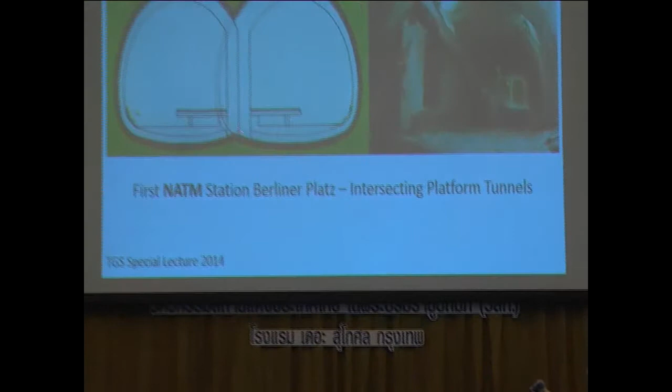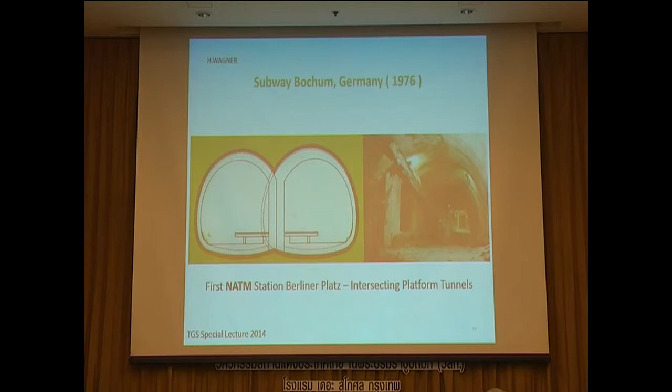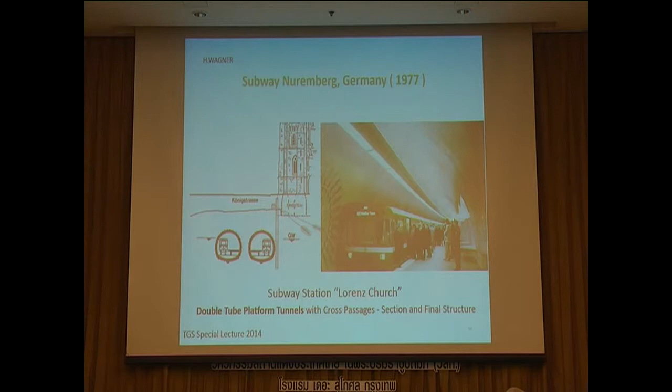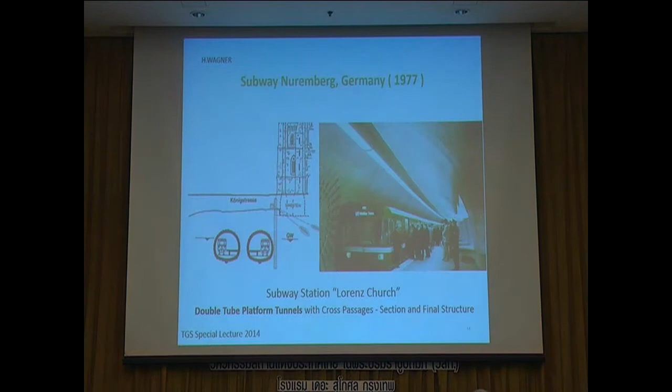The next one was another metro station for the subway of Nuremberg with separated platform tunnels, but the separated platform tunnels have been connected with access tunnels from one platform to the other. It was about the same size, 120 square meters for both platform tunnels together, but instead of the structural concrete pillar in between, there was an earth pillar.

You can see here the earth pillar, which of course needs some geotechnical consideration because of the forces coming down and having to be guided around. So this earth pillar in between is getting higher stress and has more stress accumulated than before.

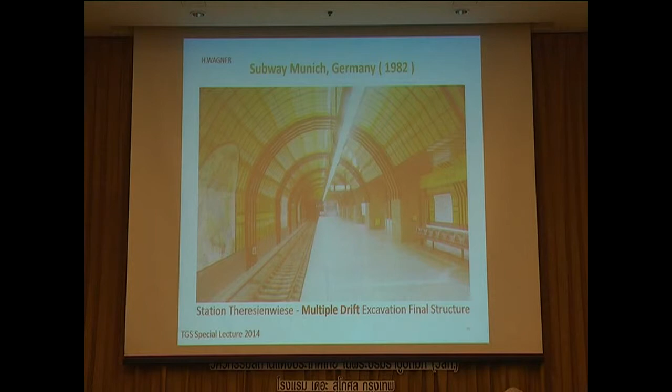Those of you who like to drink beer know that in October, under this surface, there is a station, but on top there is a lot of beer drinking. It's the famous Oktoberfest in Munich.

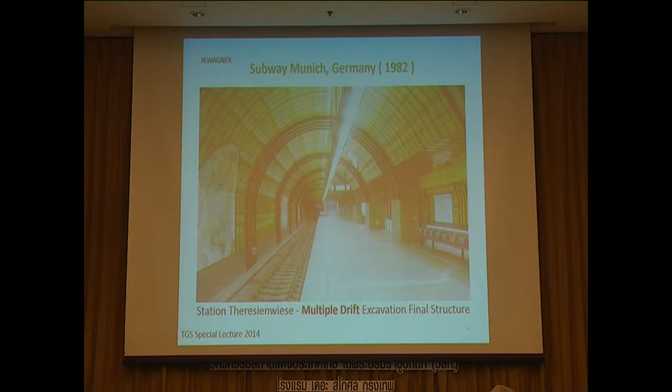So in North America, the Fort Totten metro station for the Washington metro followed almost exactly the same structural principles as experienced for the Munich metro, with one additional aspect: the environmental aspect, because this Fort Totten station has been constructed underneath a park.

There was a competition between doing the station in cut and cover and in a conventional mining method. The conventional mining method was cheaper, just comparing construction cost for the civil works, but it saved 10,000 trees on top of that station.

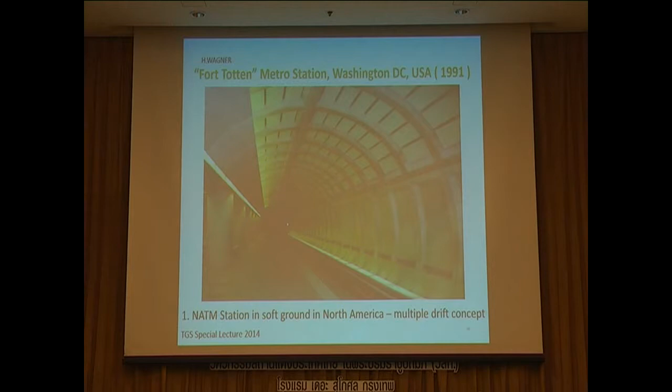So for the people from Washington, capital of the United States, it was very important to save the park and the trees where they do their jogging and so on. So it has an environmental aspect which has not been reflected in the cost, though the mining method was cheaper than cut and cover. It was a big success.

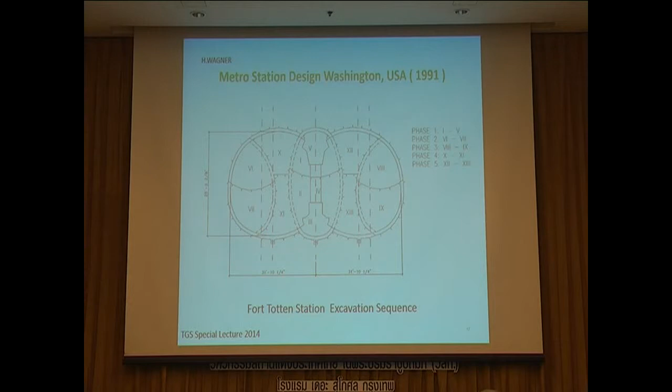Now this slide shows you the excavation steps. There's a central gallery here, excavated in steps 1, 2, 3, then the bottom beam is installed, then the pillar, then the roof beam, then the sidewall galleries here and here are excavated, and finally these shotcrete shells in the profile are demolished to get the full station size.

Washington Metro, of course, all of this needs state-of-the-art numerical modeling. Today we use finite elements.

This shows you in more detail the start of the central gallery with a top drift, then the central gallery full excavation, installation of bottom beam, pillars, and roof beam. Finally the sidewall galleries, then demolishing the sidewall galleries to get the full cross-section, plus installation of the platform.

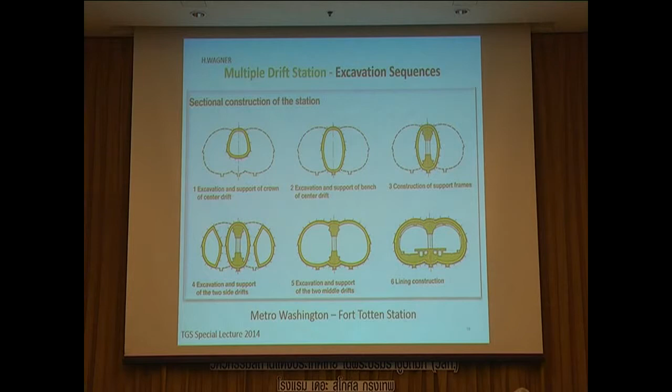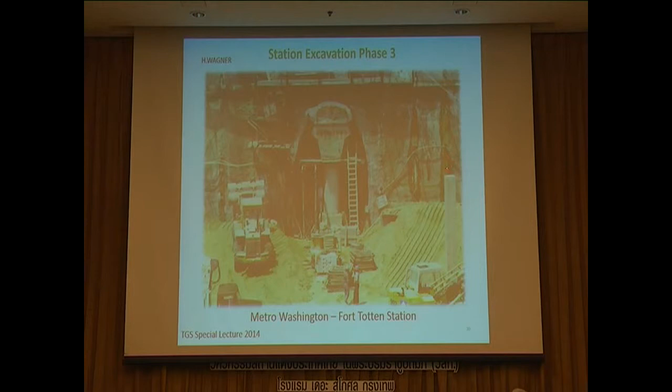Some slides from the construction. This is the portal wall, and you can see the central gallery. You can see the sidewall gallery here, and the sidewall gallery on this side. The central gallery already started to have the beams.

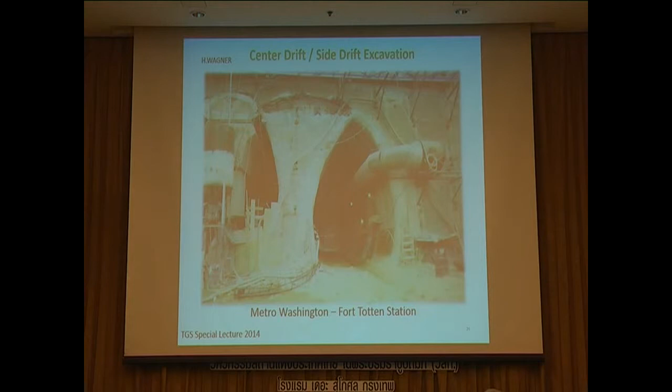Another side drift excavation, a more detailed picture from the side drift excavation. And the next shows you that this all has been in real soft ground, so some pre-running support, umbrella-like support, had to be installed.

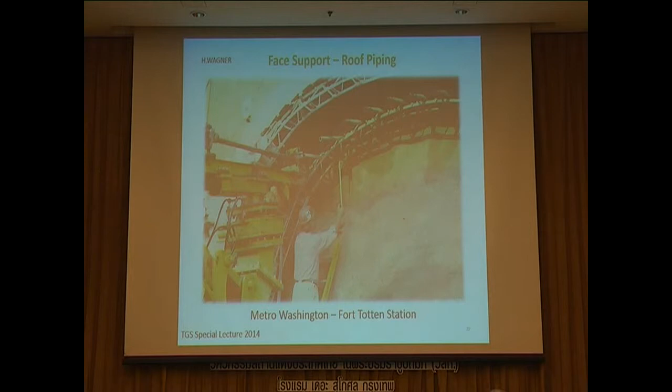Also, you can see conventional tunneling using, mostly in Europe nowadays, lattice girders, so they are not full profile steel arches. Lattice girders give a better compound for the shotcrete.

For the Los Angeles Metro Red Line, we designed for the first time a hybrid solution, which is a TBM tunnel here in this cross section and a TBM tunnel here, with a mined central gallery following the same principle as for Washington and Munich Metro, with the bottom beam, the pillar, and the roof beam. Particular emphasis has to be given to the connection, which in every multiple drift structure using conventional tunneling or shotcrete method requires specific attention in your design and construction for the connections.

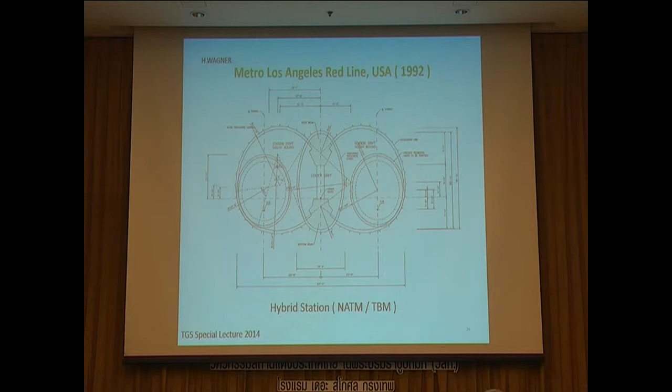For the Chawri Bazar station for the metro in New Delhi, India, a special design was developed with access to the station from cut and cover shaft areas, and then the platform tunnels, mined sections for the platform tunnel, with connection galleries in between the platform tunnels.

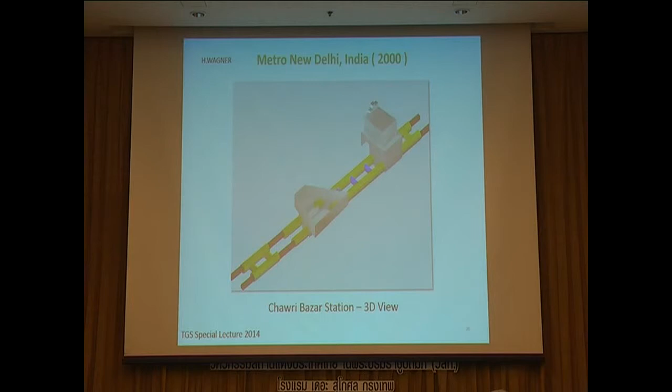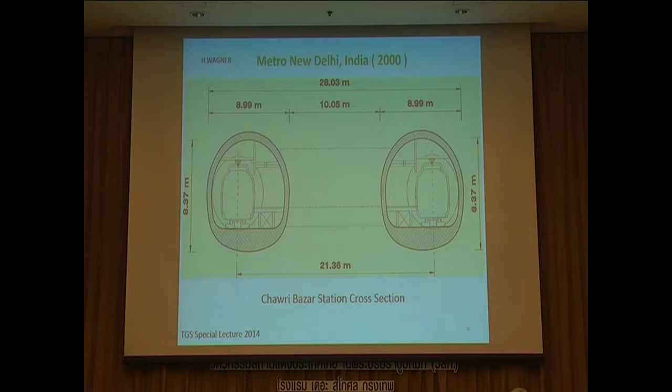New Delhi has successfully completed this. This is a cross section. You can see that there is, from center to center, 21 meters between the two platform tunnels, with a connection tunnel in between.

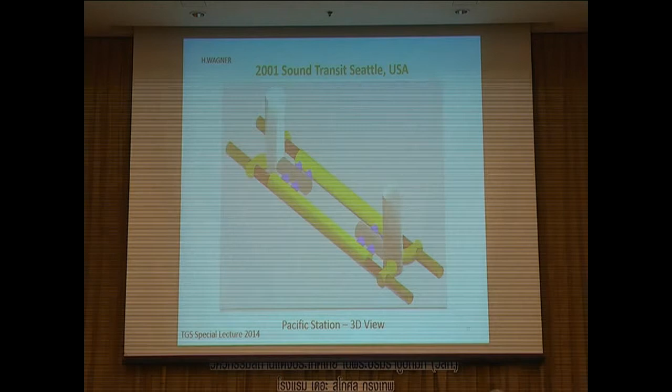Pacific Station for the Seattle Metro. The very special aspect of the Seattle Metro is that it is very deep because the tunnel has to go under the fjord. Seattle is on the Pacific coast, and there are fjords similar to Norway. To connect this line from the center of town with the university, it was necessary to go very deep under the fjord, so the station is more than 300 feet, more than 100 meters deep. Access to such a deep station can only go through shafts. You could not have access through inclined shafts; it has been necessary to do it with vertical shafts.

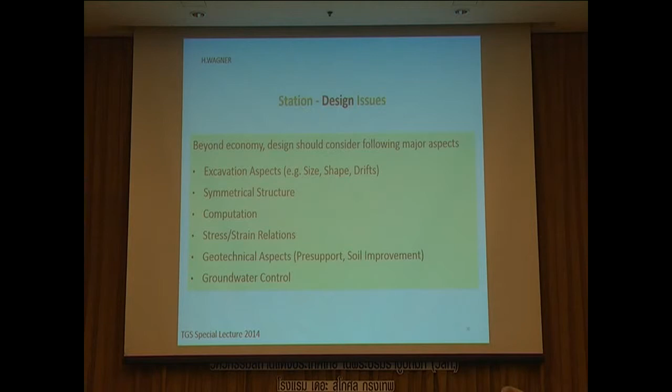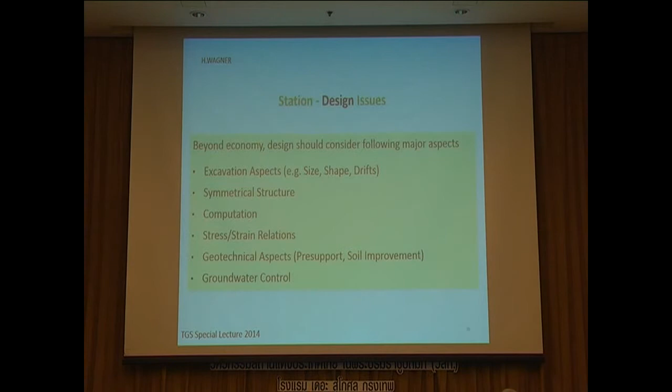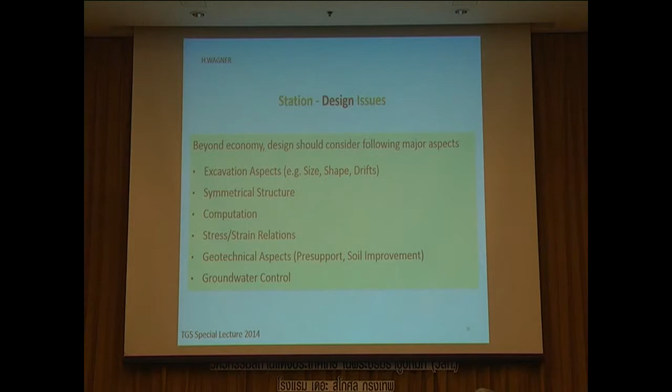So what are the station design issues? Beyond economy, the designer should consider the following major aspects: first of all, the size and shape, and the number of drifts, and the shifting of stresses in the underground. It is always an advantage if it is a symmetrical structure.

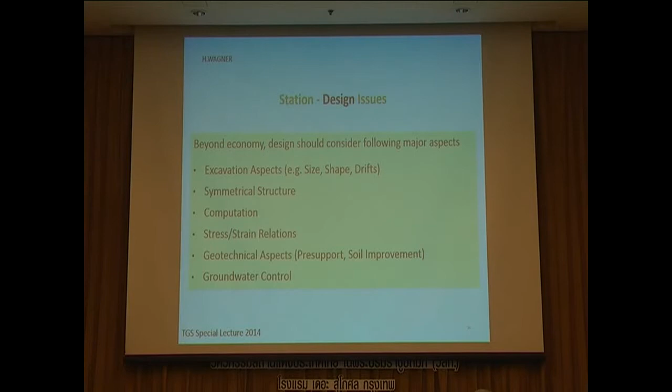Computation—everything has to be computed before we go into construction, in particular where we have to look into stress-strain relations. Then we have to look into the necessities of the geotechnical aspects, in regard to pre-support, mechanical pre-support. We have a number of tools for this pre-support nowadays, in particular also for soil improvement, which for Bangkok certainly is a very important issue.

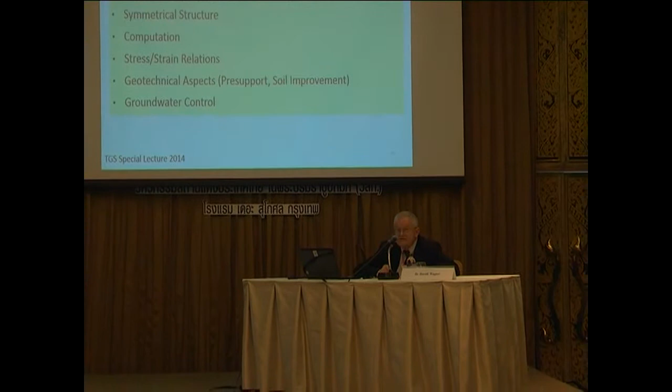There are construction issues for multiple drift stations. Design and construction methods shall satisfy all project conditions defined by the geology, geometry, and the environment—these are given conditions. Construction activity on the surface will be limited to a minimum, and a multiple drift station is limited to construction access shafts that need to be covered. So we cannot have a multiple drift station without access, and the access has to be a cut and cover structure part.

So there are structural issues like shotcrete lining. It has to take full loading in construction—this is a conservative assumption nowadays. Shotcrete quality has been significantly improved, and more projects are using shotcrete as a final structure lining. The final lining is then designed to take full loading, where shotcrete properties are converted into soil properties—again, a conservative approach. It has to be based on the superposition of load cases. We have to make the individual load case investigation, but then finally we have to make the superposition.

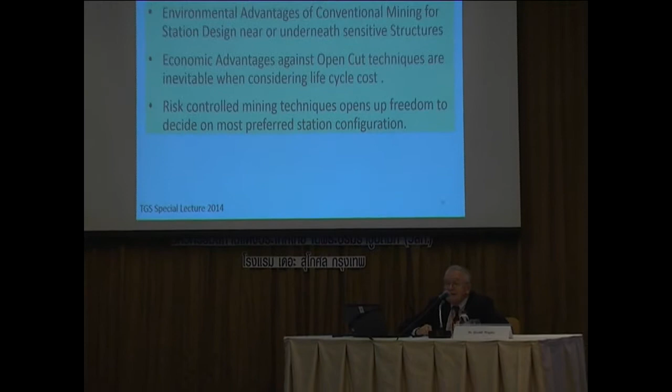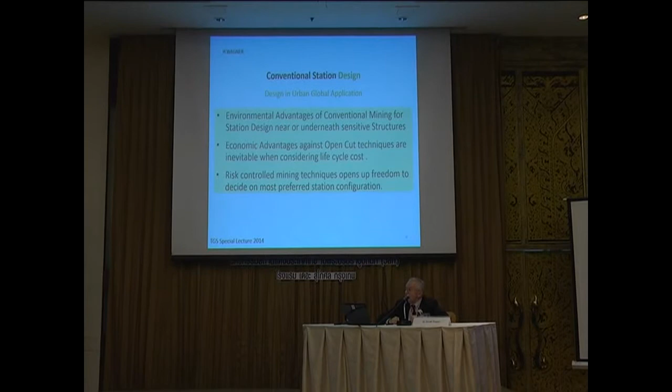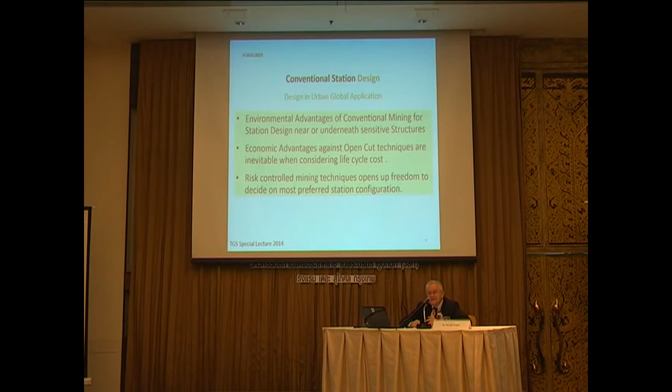In conventional station design, environmental advantages are evident, in particular near or underneath sensitive structures. Economic advantages against open cut techniques are inevitable when considering life cycle cost. We have another couple of cities right now which start to implement metros in different parts of the world, for instance in Chile, in Santiago, and in Lima, Peru. So these life cycle costs nowadays are a standard criterion for deciding what construction should be done.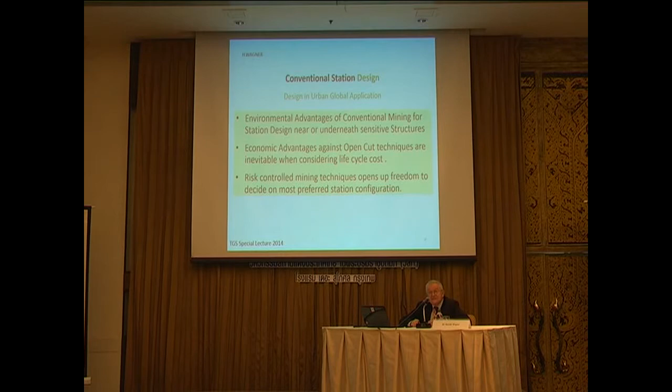And risk has to be controlled. There is always a risk in underground structures. However, there are no new risks—these risks, which are all known, can be mitigated, assessed, and controlled through risk mitigation.

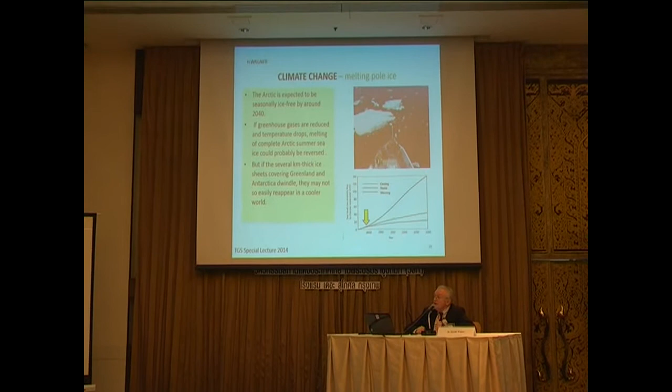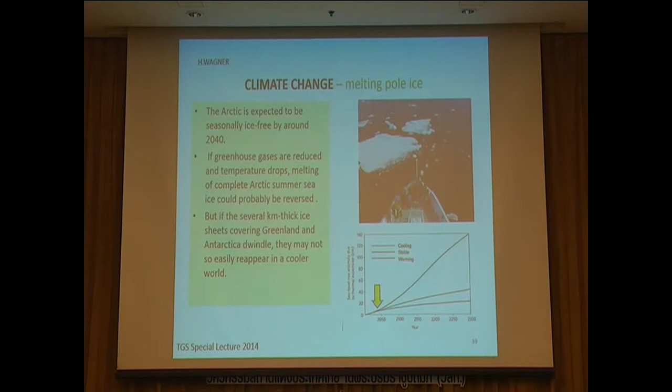Climate change, if we look to the melting ice on the poles, we know that we are 5 minutes before midnight with our measures. We have to take measures in order to mitigate the risk which comes from climate change, melting ice, increase of the seawater level.

So here you can see different forecasts: here we have 2000, here we have 2050, here we have 2100, 2300. In any case, whether we look into cooling, stable, or warming conditions, we can see that the temperature curve increases.

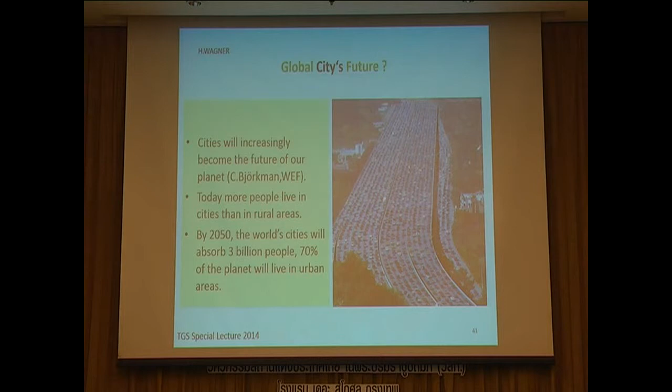So climate change is for sure out of question, it's going to happen. The future of our cities, they will increasingly become dominating our planet. Today already more people live in cities than in rural areas, and by 2050 the world cities will absorb an additional 3 billion people. So two-thirds, up to 70%, of the population on our planet will live in urban areas. Global population nowadays is 7.3 billion, not 7.1.

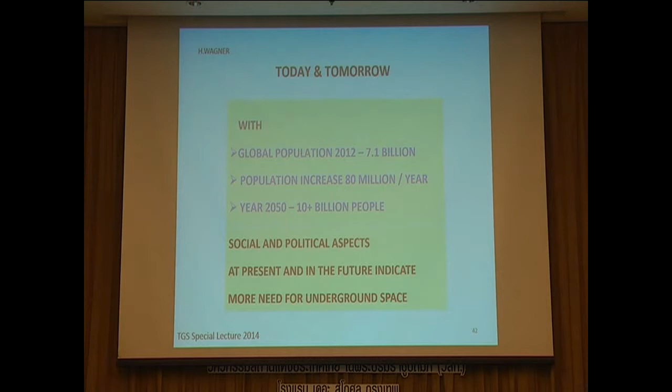The population increase per year is 80 million. We will have 10 plus billion people in 2050, so we have to look into social and political aspects at present and in the future, which all indicate there is more need for underground space.

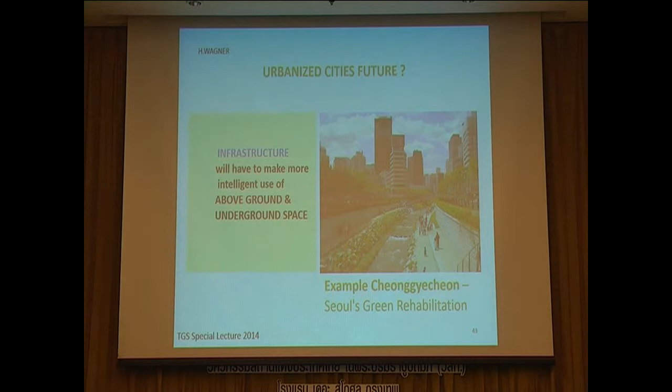An example from Korea, where originally the city and the river Cheonggyecheon has been covered with concrete bridges. Now this river is again given back to the people in Seoul, as an example.

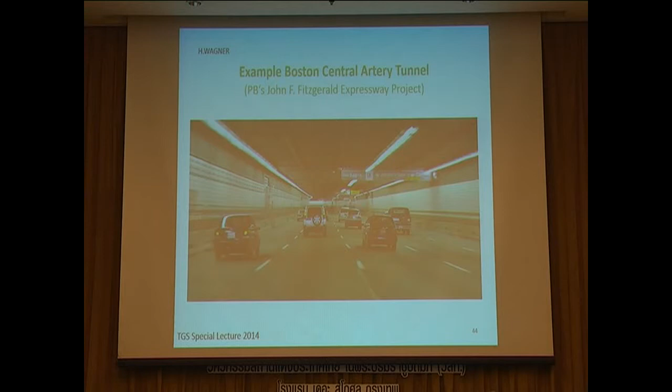Another example is the so-called Boston Central Artery. Here you can see the tunnel. Before, all of this traffic of I-93, Interstate 93 in Boston, was running through the center of the city. Now it's underground and the center of the city is very green and livable.

Urban infrastructures are for different purposes: water supply disposal, transportation, parking, shopping malls, storage, and water lines.

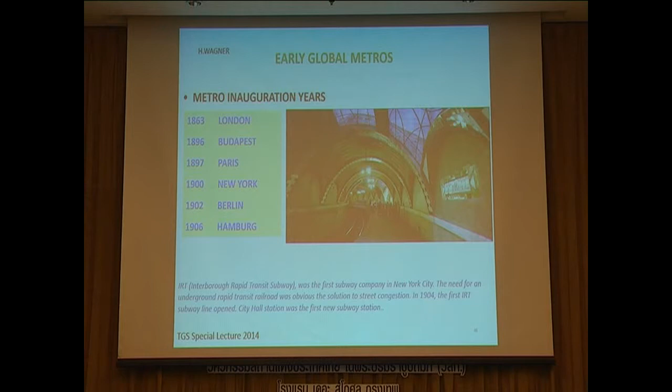We have early global metros since 1863. London claims to be the first. Istanbul at the same time says no, not London, it has been Istanbul in Turkey. Then followed by Budapest, Paris, New York, Berlin, Hamburg. Nowadays we have more than 100 cities.

Europe transportation tunnels: in Austria, where I'm coming from, close to 600 kilometers, Germany 1,400, and in all of Europe we have 16,000 kilometers of transportation tunnels only.

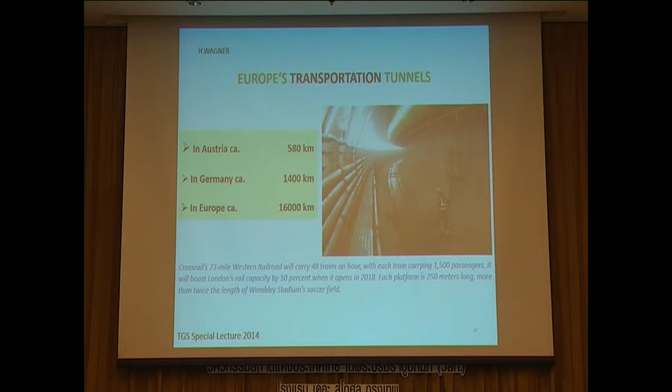The largest TBM right now is on the so-called Alaska Highway in Seattle. It's a 17.5 meter diameter tunnel boring machine, at this moment not working. People are facing geotechnical problems.

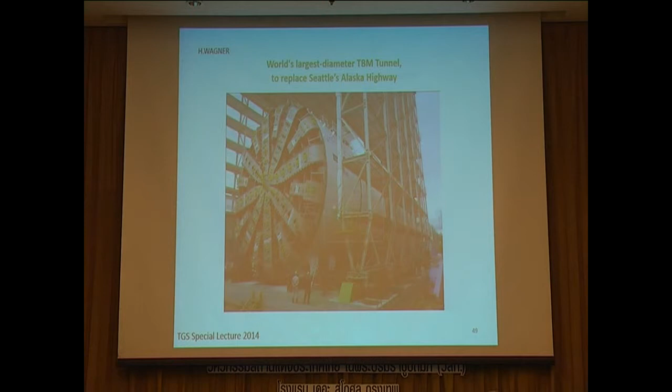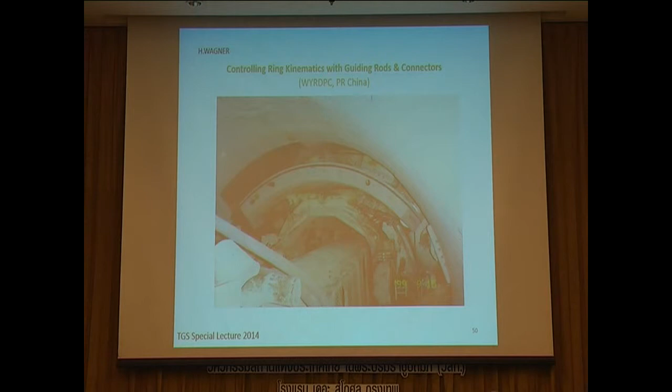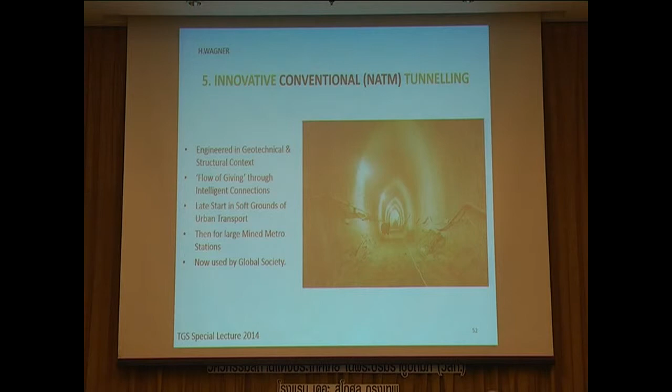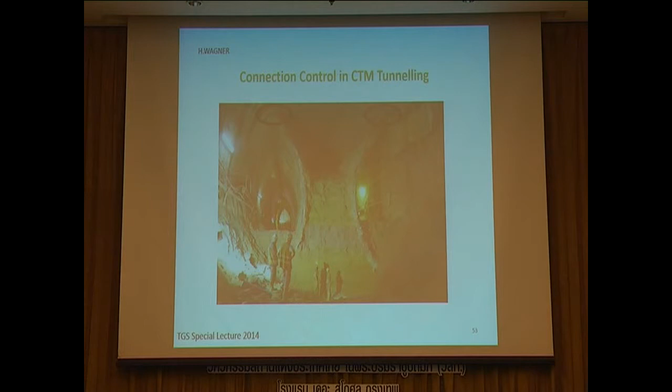Now we have innovations in conventional tunneling, you may look into your slides - I'm running out of time. There are the connection controls: if we have multiple drifts, we have to particularly look into the connection of the multiple drift areas with the final structure. We have conventional tunneling phase and in situ lining, of course, shotcrete lattice girders.

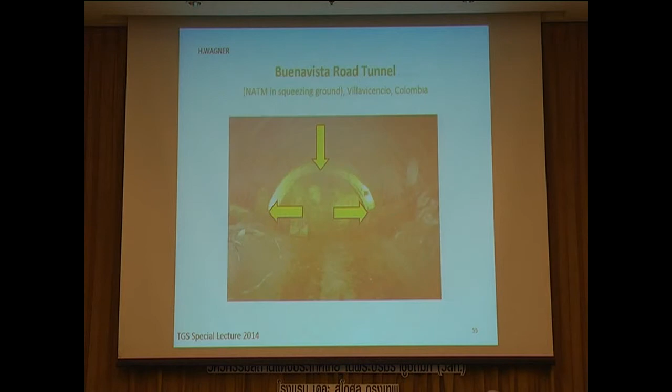We have sometimes very squeezing ground conditions. This comes because we have forces, the geostatic loads, which are deforming, settling the roof here and moving the sidewalls outside.

Flood can be controlled with flood tunnels. Just to let you know, the real cost of the damage in November 2011 here in Thailand - one third has been paid by the insurance companies, and it's the amazing amount of $30 billion US. This is only one third, so the real damage has been $100 billion US from one flood event in 2011.

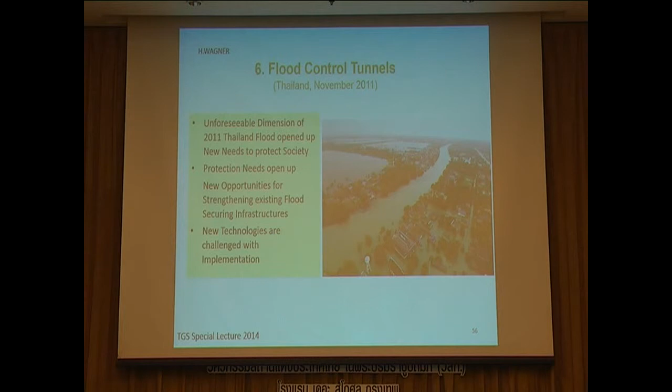And we can control flood with tunnels. This is the flood caused by the Sandy storm, very well known, and it was predicted to be over after 6 or 7 days by the mayor, but actually it has been more than 3 weeks that the New York subway has been under the influence of floods.

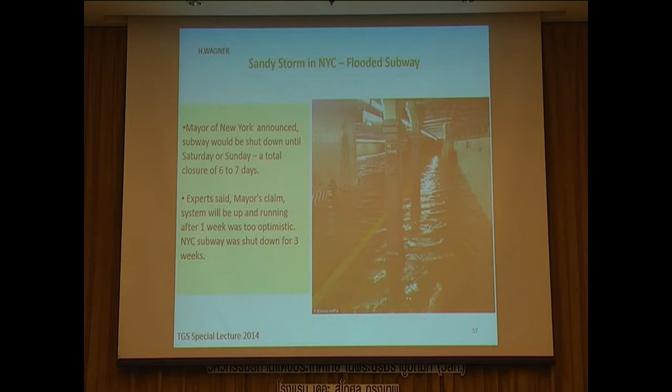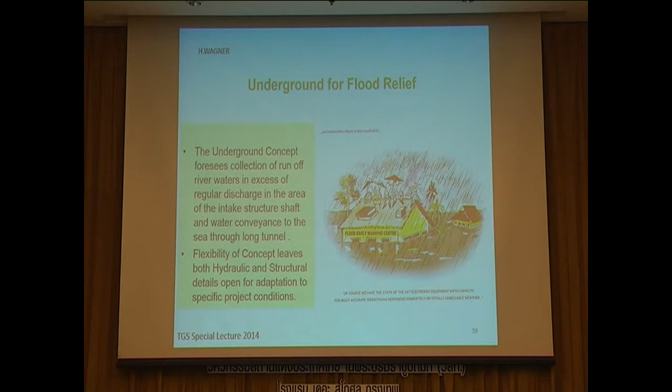All of the coastal areas are at risk, in particular with climate change and melting ice balls. This is a funny picture you can see here - this is the flood warning center, the early warning center. Of course, we have the state-of-the-art electronic equipment with capacity for most accurate predictions, dependent completely on the totally unreliable weather. So this is the fact that we have to use more tunnels in order to mitigate this problem.

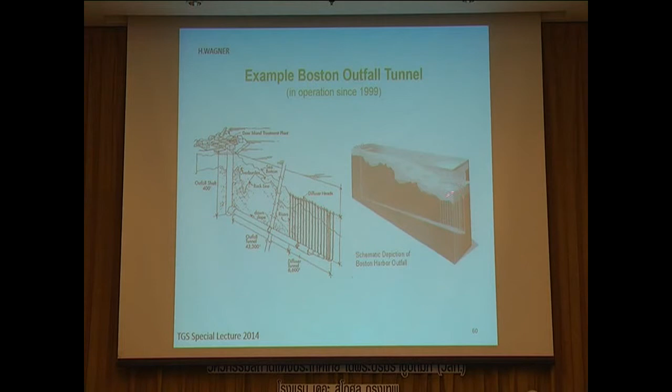This is the example which works in Boston, because I have been working on that project in order to control a flood which comes for a 15 million population of the greater Boston area. This Boston outfall tunnel uses a 400 foot shaft and then drains out the water into the diffuser heads in the harbor of the tunnel. Here you can see a block picture, and it perfectly works.

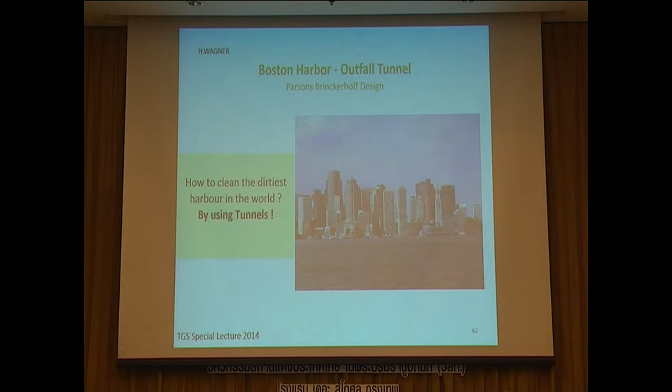So the question was - this is the idea which I developed for Thailand here, for the greater Bangkok area flood relief tunnel. The motto has been: how can we clean the dirtiest harbor in the world, which Boston has been actually. I have seen both before this tunnel has been implemented and after, and now it's a very, very clean project.

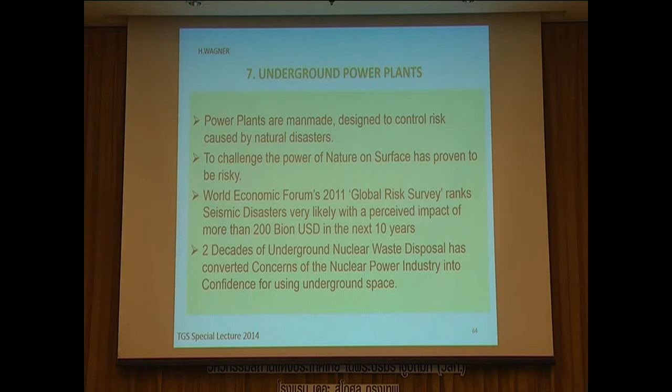That's another idea of the same model. We can go underground for power plants. I have no more time to explain further, but particularly for nuclear power plants, there is currently a preoccupation among planners following the principle highlighted by Fukushima, a terrible accident caused by the tsunami and high waves, which we all know about from weeks and months of daily media coverage. We should put our power plants underground, because the underground will protect them.

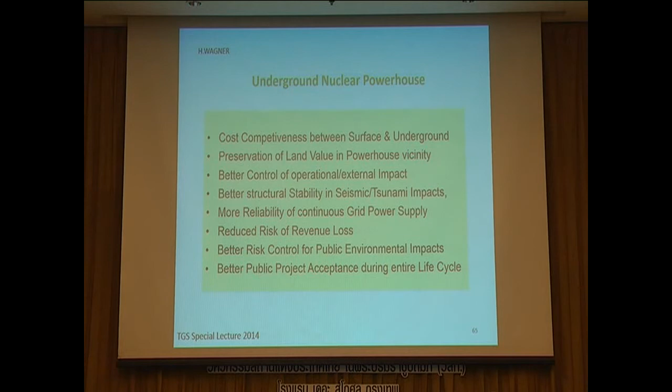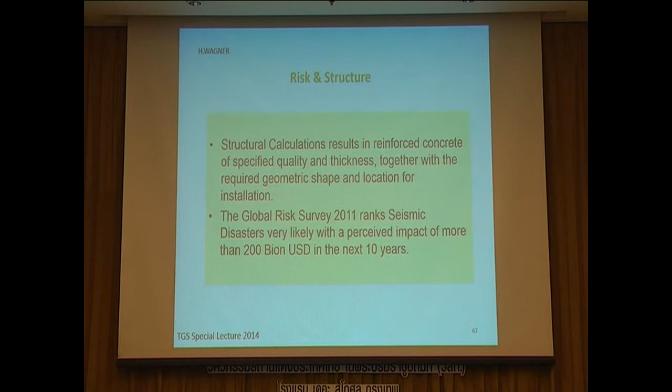So there is Fukushima, there is risk, and there is structure comparison. Of course, the risk is much better controlled underground than above ground, because rock overburden gives better protection than concrete, even very heavy concrete.

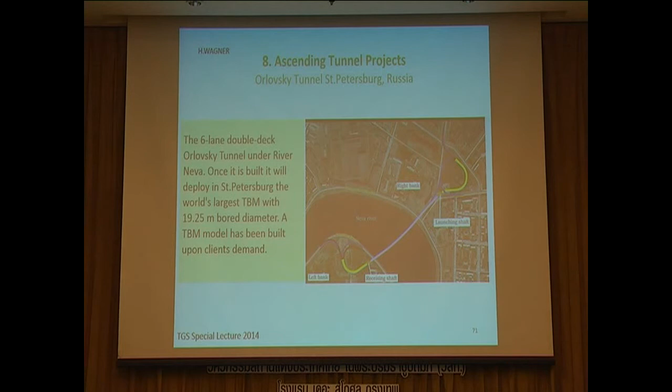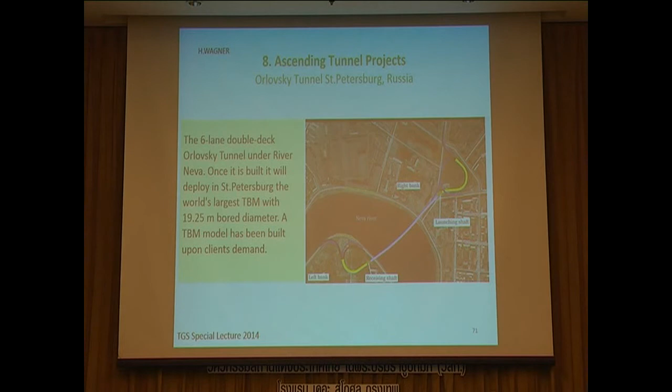There are ascending tunnel projects using tunnel technology of up to almost 20 meters in diameter in St. Petersburg, Russia. The project has not yet started, but the machine has been designed and completely prepared. This is a double-deck tunnel, almost 20 meters in diameter.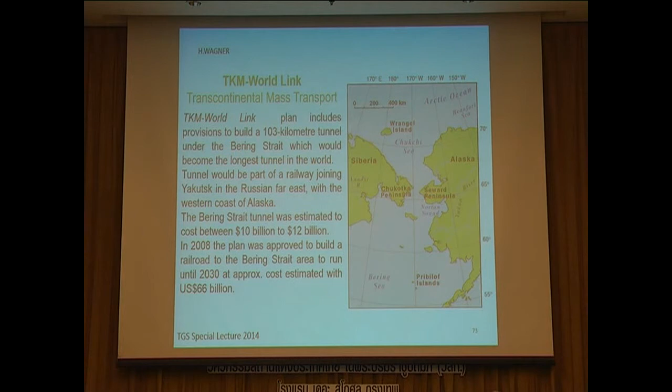Transcontinental mass transport between Siberia and Alaska is a project. It's an engineering dream, but I think it's getting very close to becoming reality, maybe in 10, maybe in 20 years. Another idea is the tunnel between Java and Sumatra in Indonesia.

It's a 35 or 33 kilometer long tunnel. It's also in the study phase, like the Gibraltar tunnel.

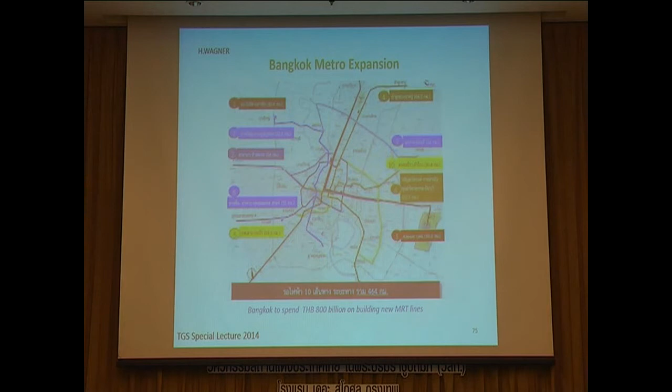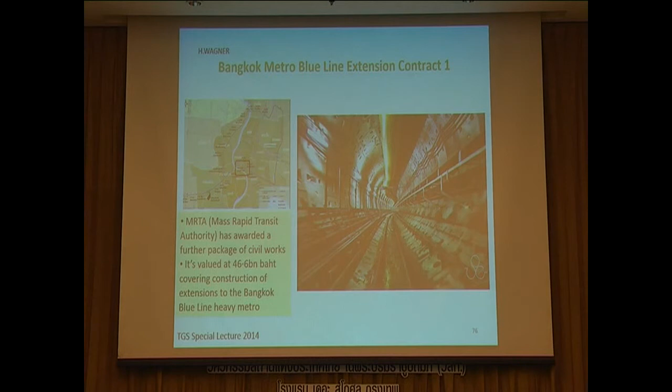Bangkok is going to extend its metro system, spending approximately 800 billion Thai baht over the next 10 years. One example is the Blue Line extension and the Sanam Chai station, which we heard about in the morning lectures.

Singapore is also going to spend 20 billion Singapore dollars in the next couple of years. So Singapore will also have a mass transport system in the range of 450 kilometers.

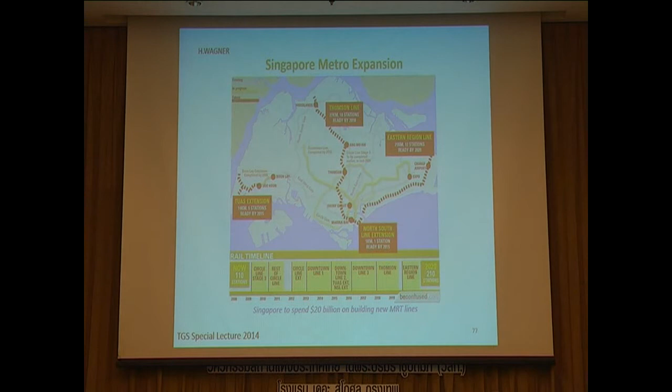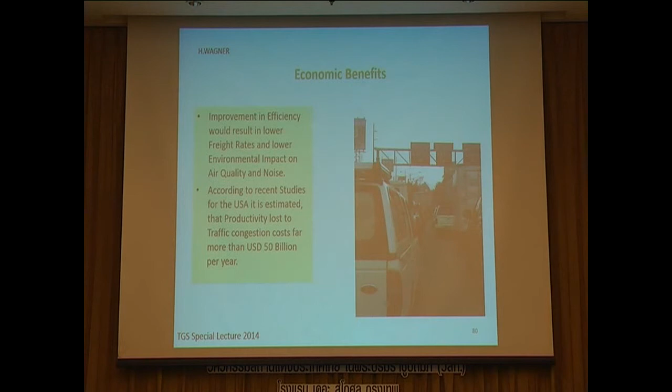Freight could also be transported underground. There is a logistic benefit to it, there is an economic benefit to it, and there's an environmental benefit to that. And finally, the cost benefit of urban tunneling.

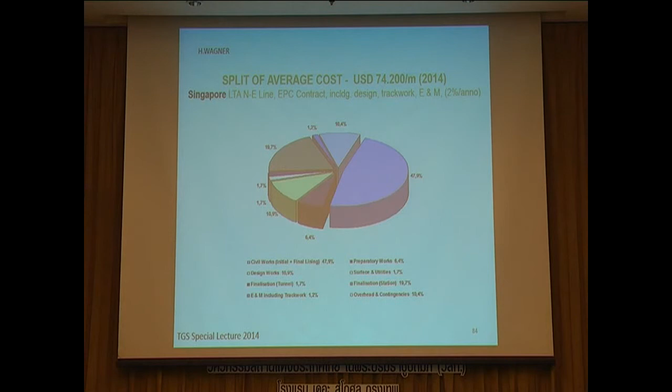I'm just summarizing some pictures here. There is a cost comparison between mainly German cities in this slide, showing a split of average cost, which is about 74,000 US dollars at today's value, including design, track work, and electrical mechanical works.

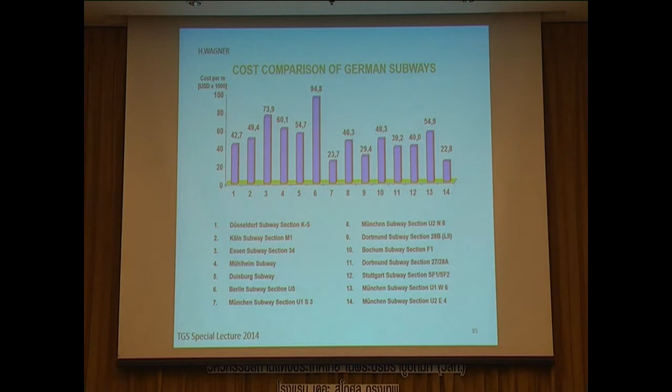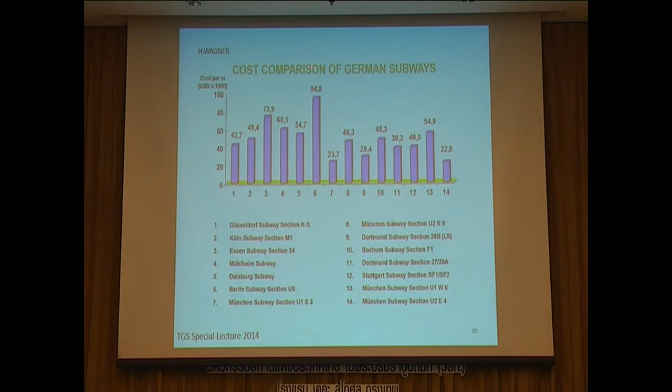We have a summary of German subways, and you can see that it varies quite a bit, between 23,000 US dollars per meter of tunnel at the low end, and the most expensive one at 94,000.

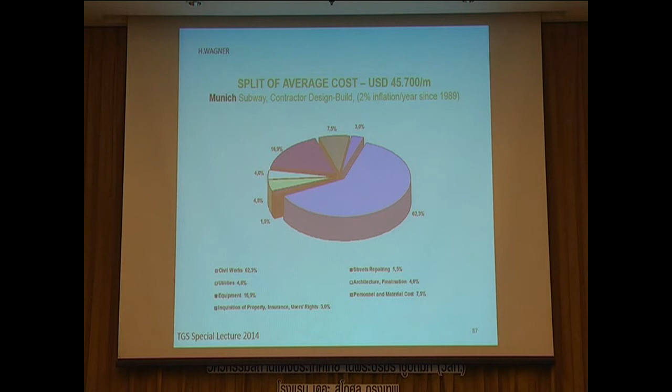That's a more detailed breakdown, and please look into the handout for the comparison of this cost and the split of the average cost. For the Munich subway, it's amazing, much lower than Singapore, at 45,000 US dollars per meter, including different construction methods. Very expensive, unfortunately, the Vienna subway, and I told you the Vienna subway started about 15 years after the start of metro construction in Germany.

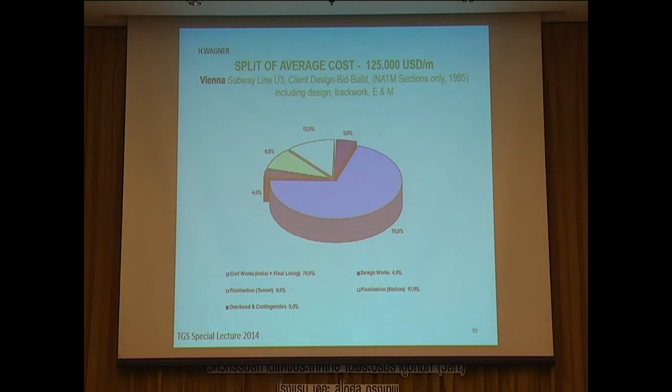So the experience should have been quite fresh to draw on, yet finally it was more expensive, with a split of average cost close to 100,000 US dollars per meter. But if we look into only conventional tunneling methods in Vienna, we come up with 125,000, not taking into consideration life cycle cost.

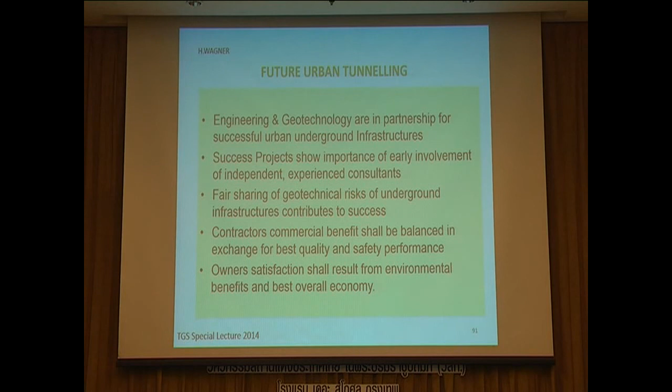So what is the future of urban tunneling? We have to make a partnership between engineering and geotechnology for underground structures. This shows the importance of independent consultants. We should not squeeze the consultants now - I'm biased a little bit. It should be a fair sharing of risk. This is important; the risk, which is always there, should be fairly shared, and there are guidelines for that. The party who is most capable of managing the risk should also be allocated that risk. The contractors should have a commercial benefit, and the owners should be satisfied with the quality and performance of the result.

So, thank you very much.

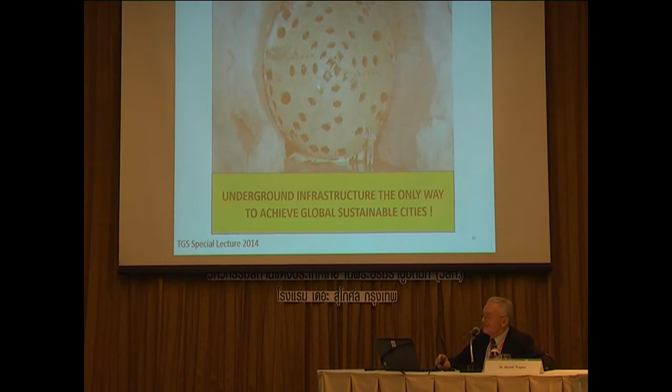There's one in between, maybe. Yeah, okay. Thank you very much for your attention, and please don't hesitate to ask questions. I think we arranged for the questions afterwards.